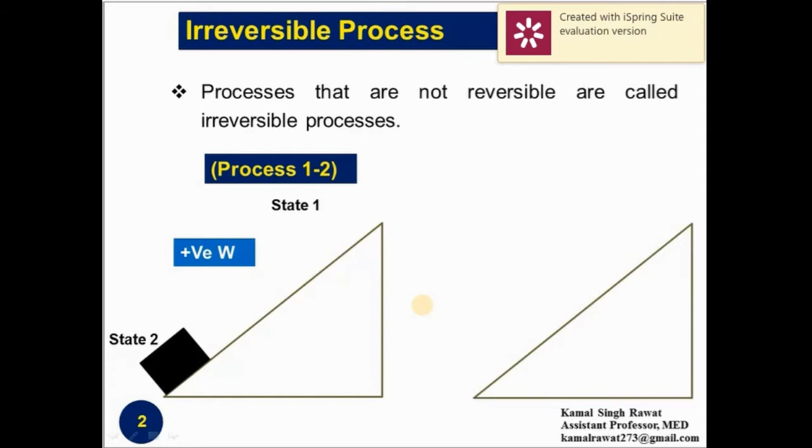If we reverse the process, the surrounding does W work on the system, then the block reaches its initial state by following the same path as process 1 to 2. So this process also occurs in the same manner, a quasi-static process, very slowly. So in this example, the system follows the same path, and in this process the surrounding has to do W work on the system.

So in this example, the system follows the same path when the process is reversed, and it can also be seen that the net effect on the system and surrounding is 0. Then this can be an example of a reversible process.

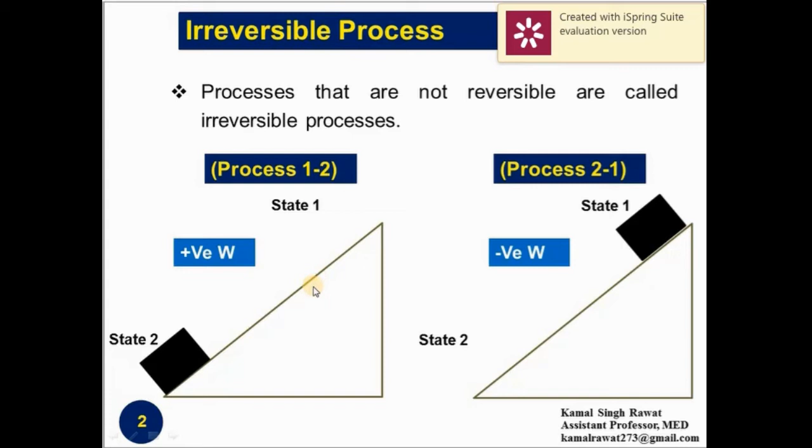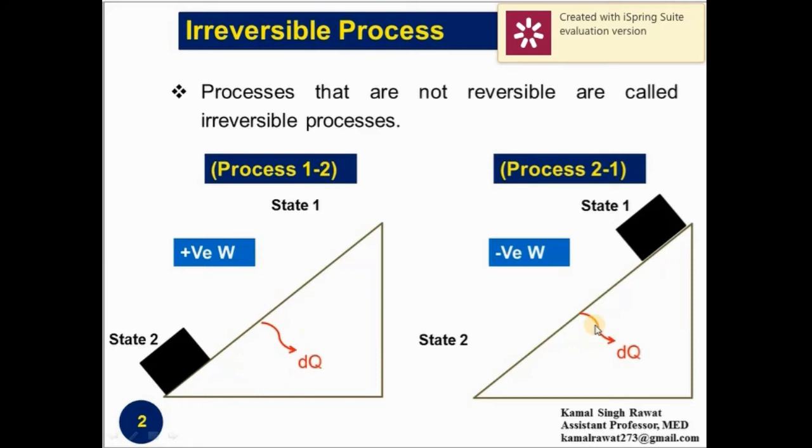However, when the block slides over the inclined plane, there is friction between the surfaces, and in both processes heat is generated. It means this is not an example of a reversible process, because heat is continuously supplied to the environment or surrounding. None of the processes in the universe is reversible, and most of the processes are irreversible in the presence of friction. So we have also seen in the previous example, the process is not reversible because of friction.

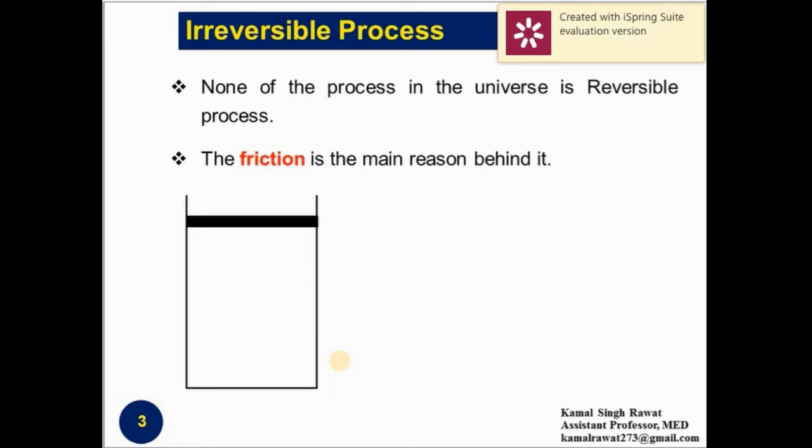Let's again take the example of the piston cylinder in which W weight is placed on the piston. We have divided this W weight into n number of equal parts. So if we remove this weight one by one, we will get the path of the process. And if we put the weight back one by one, we will reach our initial state and the system follows the same path. However, the reciprocating motion of the piston over the cylinder generates heat due to friction, which makes this process also an irreversible process.

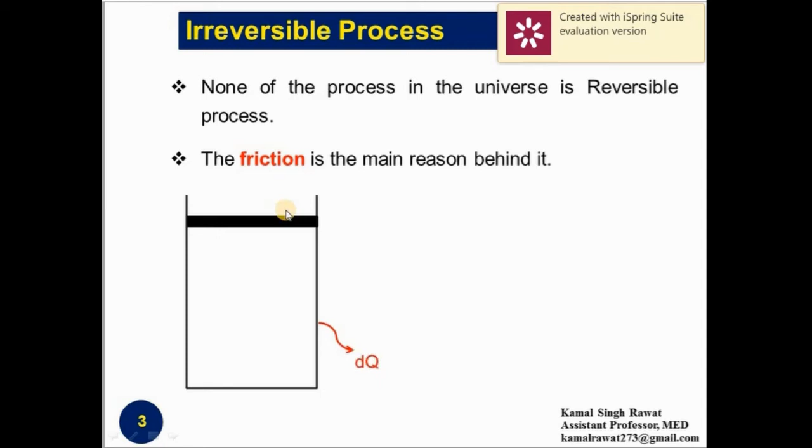If this piston cylinder is frictionless, then this process will be a reversible process, but in the presence of friction, this process is an irreversible process. So we can say all quasi-static processes cannot be reversible processes. Only frictionless quasi-static processes can be reversible processes.

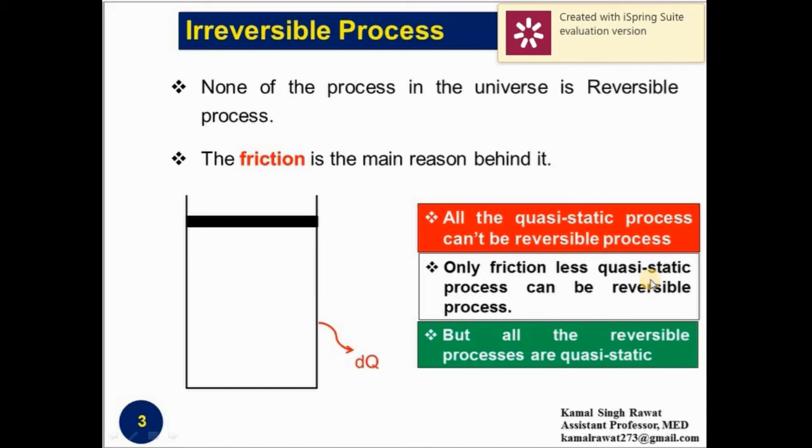However, all reversible processes are quasi-static processes, because for a process to be reversible, the system must follow the same path, and the path is only defined when the process is quasi-static. So all reversible processes are quasi-static processes, but all quasi-static processes cannot be reversible processes. Only frictionless quasi-static processes can be reversible processes.

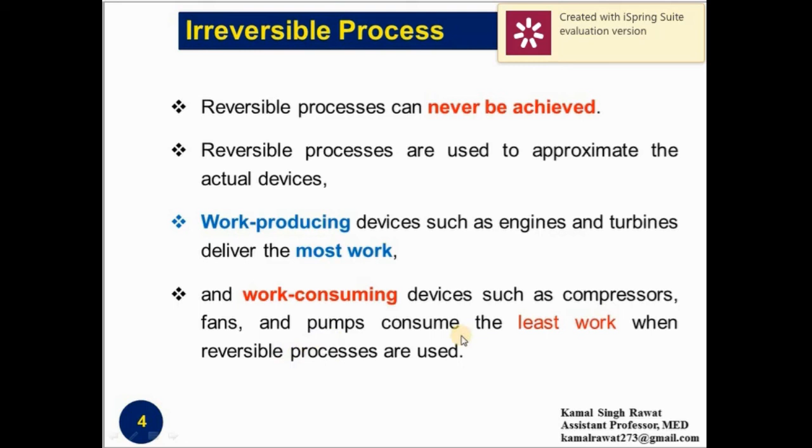Reversible process can never be achieved. So it is an ideal process which cannot be achieved in practice. However, still we use the reversible process to approximate actual devices, because work producing devices such as engines and turbines deliver the most work in the reversible process in the absence of friction, and work consuming devices such as compressors, fans, and pumps consume the least work when the process is reversible.

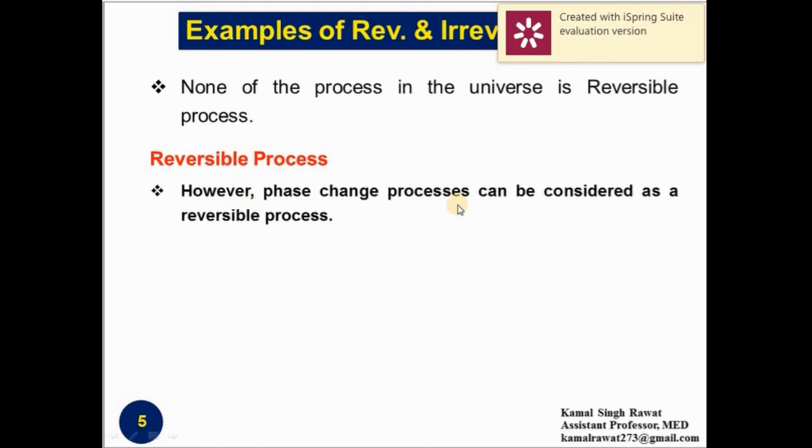So this point we have already discussed. None of the processes in the universe is a reversible process. However, the phase change process can be considered a reversible process. So all processes in the universe are irreversible, but there are some processes which are highly irreversible, which are throttling, unrestrained expansion, which is also known as free expansion, mixing of two fluids, and heat transfer across a finite temperature difference. So throttling and free expansion are two important processes, and we will discuss these processes in detail in the upcoming lectures.